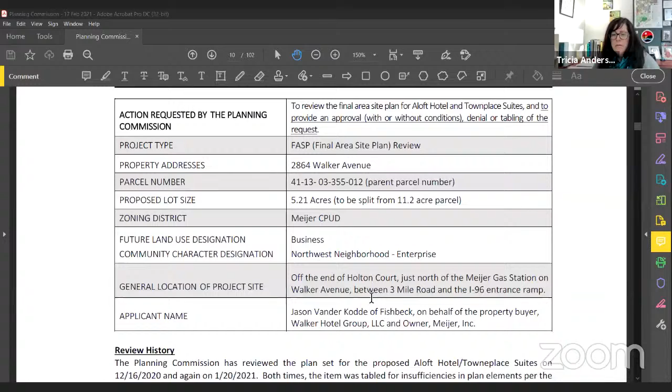This is a split that will result from the 11.2 acre parent parcel. It's part of the Meijer CPUD. And the future land use designation is business, northwest neighborhood, enterprise for community character designation.

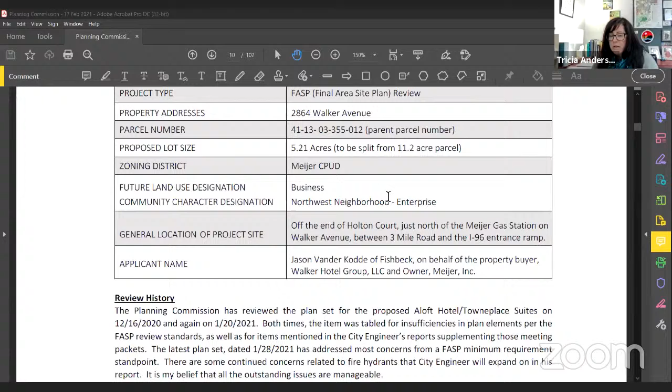Again, this is off the end of Holton Court, and it's just north of the Meijer gas station on Walker Avenue between 3 Mile and the I-96 entrance ramp. And we have Jason Vander Kodde of Fishbeck joining us to represent the property buyer, Walker Hotel Group, and the owner of the property is Meijer Incorporated.

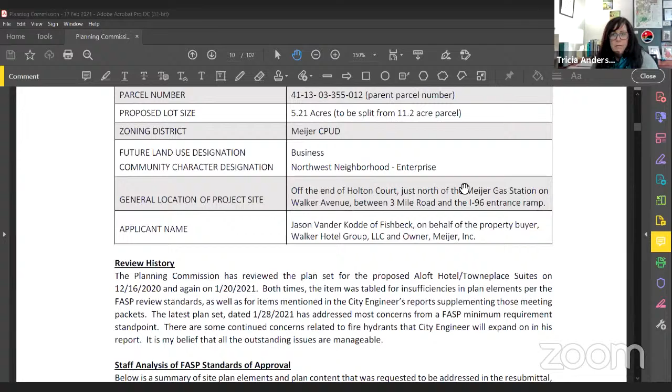I only have a few comments because this is our third go round with this agenda item. And this third time, the applicant has addressed most of my concerns. I just have a few minor manageable items that I would like to bring to your attention. And I'm going to go back to sharing my screen.

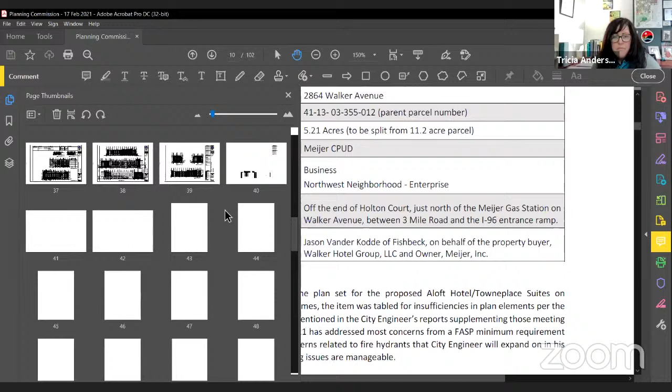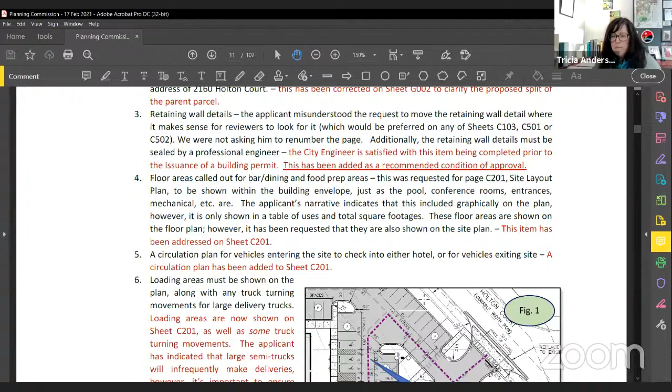I should have just kept it on share. So the main items that I would like to go through, if I can ever get to this little picture I'm looking for. The first one being that we asked the applicant to provide us with some truck turning movements and some site circulation.

A few truck turning movements were provided, but there's one that concerns me just a little bit, which is if a truck is coming in - picture your beer distribution truck from Founders or any kind of semi truck that comes in to deliver beverages. So they've created a designated loading zone here, but we need to make sure that trucks coming in through this entrance and heading over to this loading zone to unload for items being delivered to the WXYZ bar can actually make that movement without hitting anything.

And so this is manageable. We've asked that the plans be revised so that we can see that a truck can get in here with no problem.

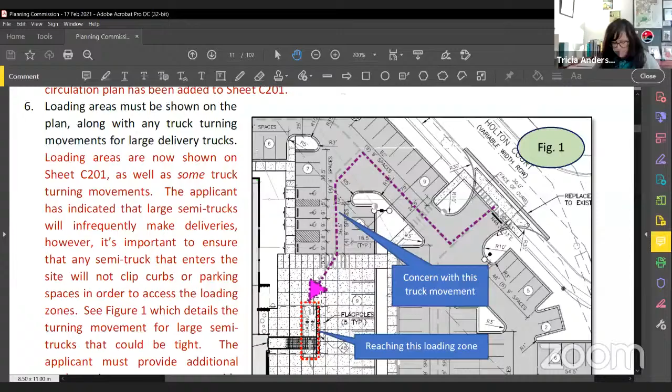And so that's recommended as a condition of approval.

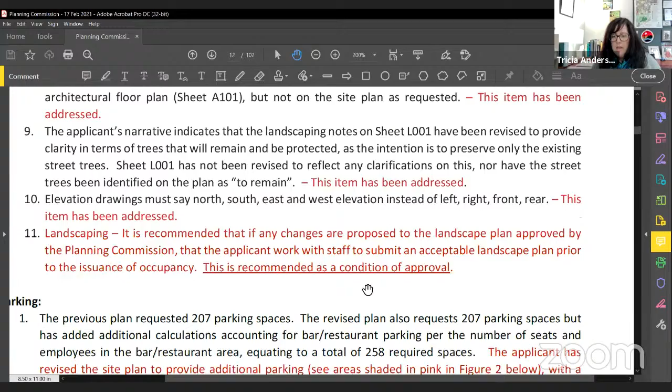The other thing I wanted to touch on briefly is landscaping. The landscaping plan that was provided is acceptable. But if any changes are proposed to that landscape plan after this planning commission meeting, it would be helpful to allow staff to work with the applicant to approve any changes to the landscape plan without the need for the applicant to go back to the planning commission. So I've added that as a recommended condition of approval.

In the previous plans, the major item of contention with this plan was parking. With all of the uses being proposed on this site—the 2 hotels, the conference rooms, and the WXYZ Bar and Grill—that would require a total of 258 parking spaces.

Previously, the applicant was asking for 207, and we weren't quite comfortable with that, knowing there is a possibility for all these uses to be in use by not shared users all at the same time. So this recent plan provides 244 spaces. If you'll see on the screen here, I've highlighted the areas in pink where parking has been added to the site.

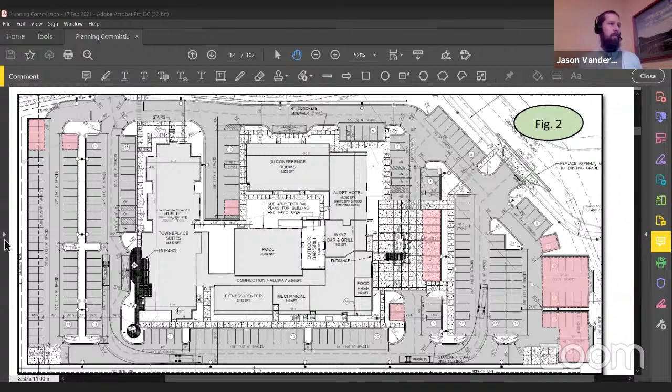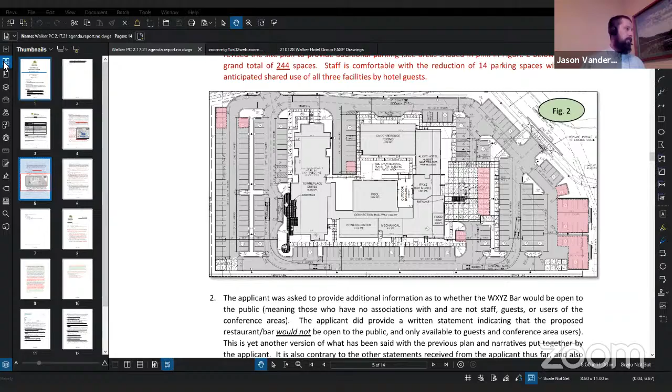Tricia, is it possible for you to bring up the page of the document, page 12 of 102? My computer's really slow. Okay, no worries. So in answer to the question, there's... if you have it, Jason. Sure. Jason, am I able to share my screen a moment? Yes, if Jason can. Says that it's disabled, so. Yeah, Jason can. Try now. All right, there we go. Can you see my screen? Yep. All right, I'm going to try to zoom in here just a little bit better. I think that's about as good as I'm going to get.

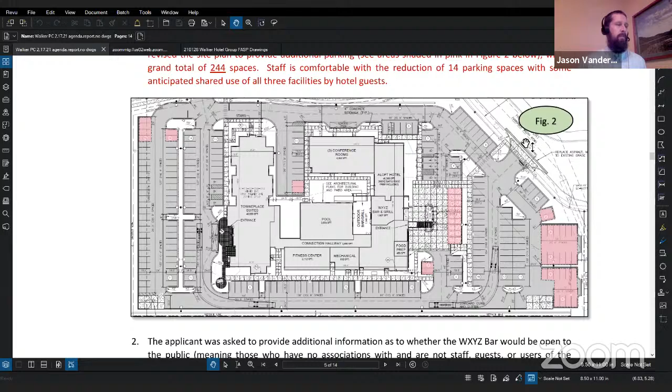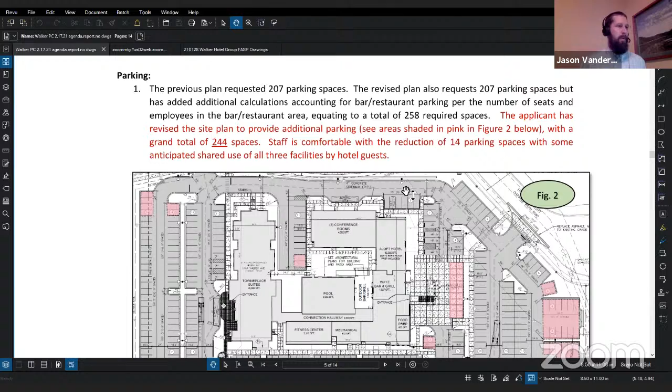In answer to Tom's question, Tom is curious how the traffic is going to make a right-hand turn into the parking lot and a left-hand turn into the loading zone. That is the move we anticipate smaller vehicles like an Amazon delivery or a FedEx box truck would make. If it's a larger truck with a trailer, that would be too long for that sharp a turn. The vehicle would have two other choices: they could continue around the hotel in the counterclockwise direction and come into the loading zone from the east, or they could come in along Boyer Drive, make a left turn, and then a right turn to get into that same loading zone from the other direction. So that movement may preclude a large trailer, but will accommodate most small vehicles. Large vehicles will simply do a counterclockwise or clockwise motion around the hotel to get there. So we'll provide a truck turning template to show the largest vehicle that can safely make it.

And if there is a larger vehicle, there's two alternate routes for them to accomplish the same parking space. So the loading zone is in the front door of the hotel. That's correct, that's where most supplies and materials are brought into the facility. And it's not large volumes, it's fairly small volumes and fairly small deliveries. A lot of the hotel operation is self-contained with the laundry room, and the other services they provide are self-contained within the building for the most part.

Well, other applicants have heard this comment before, that yeah, small trucks, right? And someday I'll take a picture of a 53-footer trying to make those maneuvers in there. So I think it's a poor location for a loading zone, but it's not my hotel.

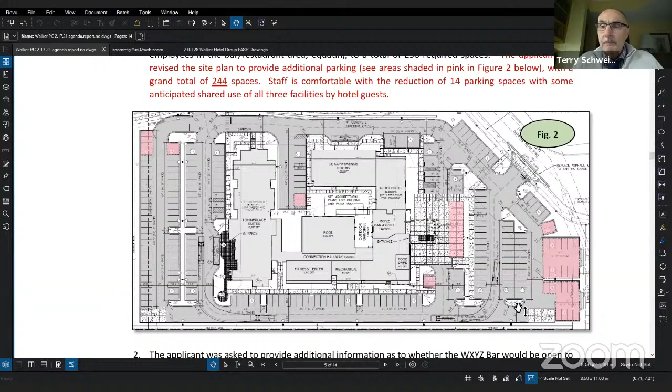Thank you, Tom. Any other comments or questions? Well, are we in a position now to entertain a motion for action on this request?

I'll make a motion, case number 20-879, motion for Aloft Hotel Towneplace Suites final area site plan. I make a motion to approve the final area site plan set, last revision dated 1/28/21, for the Aloft Hotel and Towneplace Suites project within the Marriott CPUD located at 2864 Walker Avenue with a future address at 2160 Holton Court, as it does meet the standards set forth in the City of Walker zoning ordinance.

Conditions of final area site plan approval. Number one, the applicant shall provide 4 sets of sealed plans reflecting all conditions of approval prior to the issuance of a building permit. Number two, the applicant shall provide a drawing of the retaining wall details, sheet C510, sealed by a structural engineer prior to the issuance of a building permit.

Number three, the applicant shall revise sheet C201 to provide additional truck turning movements for review and approval by the city engineer to ensure maneuverability prior to the issuance of a building permit. Number four, the applicant shall work with staff to review and approve any changes to the landscape plan prior to the issuance of occupancy. Findings of fact: the final area site plan conforms to the current and proposed City of Walker master plan.

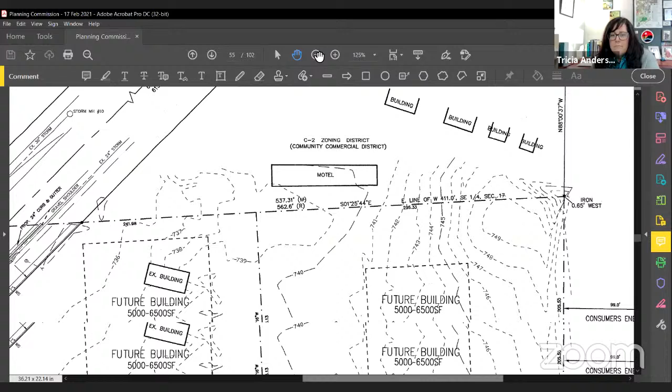Okay, so here is the original PASP. Oh my gosh, technology. We're getting there.

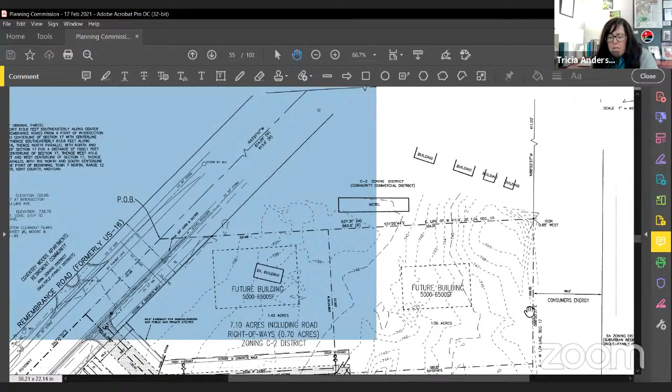Okay, so this is Remembrance Road over here. This is the existing motel. They have quite a big parking lot in the back to the north, and then there's the Dollar General building here. When the accessory building was first proposed, the site plan showed the building as being sort of right here, right over this conceptual line.

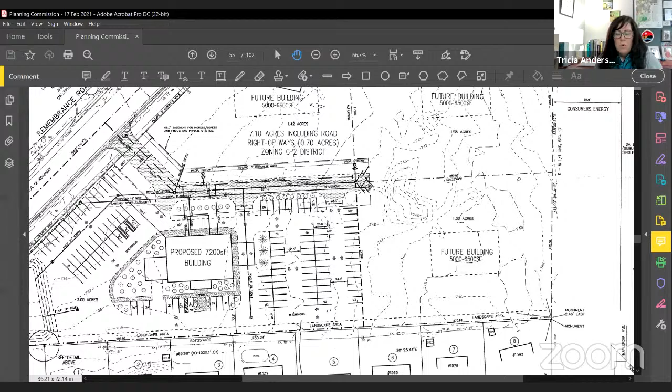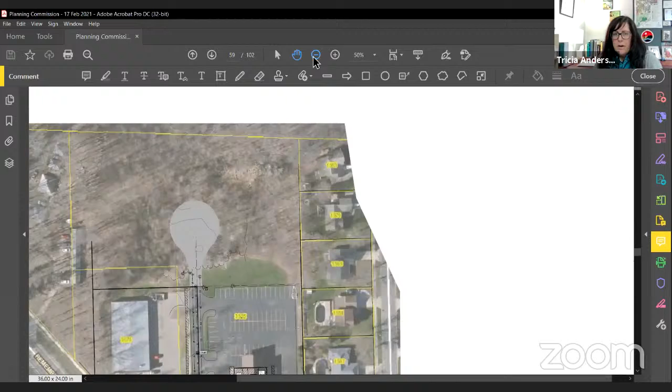Because of that, staff said to the applicant that we should probably have you guys update this PASP so that if these two lots to the north do end up getting developed, we'll have a clearer, updated conceptual lot lines for you, or for a potential developer, to go by. So we have Steve Witte, who's representing the mortuary, and this is what he has come up with.

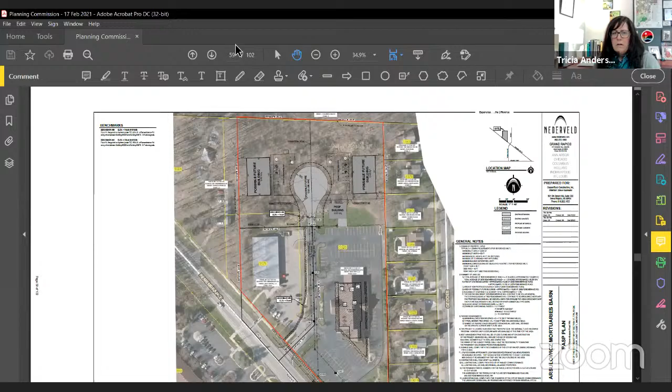So in the future, if these two lots are to be developed, this would end in a cul-de-sac road here, and this would be a private street. The building is being proposed right here, and what they've done is moved this conceptual lot line out so that there's at least 10 feet between the building and this conceptual lot line. He's also put some updated building and parking lot layouts for these two outlots if they're ever developed.

At the time, it made a lot of sense for the property to be developed as a planned unit development, because development was really booming in 1999 — there was a lot going on over in that Walker Village area. It made sense to start securing easements for access, so if they ever wanted to allow future development on the northern end of the site, they'd have everything ready to go.

But there hasn't been any movement on development on those two sites. Now that we have the property owner requesting planning commission approval for the accessory building, we asked them to update the plan. They've done that, and staff is supportive of the changes, which are minor, to the updated PASP, and we don't have any issues with the proposed outbuilding. The city engineer has some comments related to utilities that will come into play if those other two lots to the north ever do get developed.

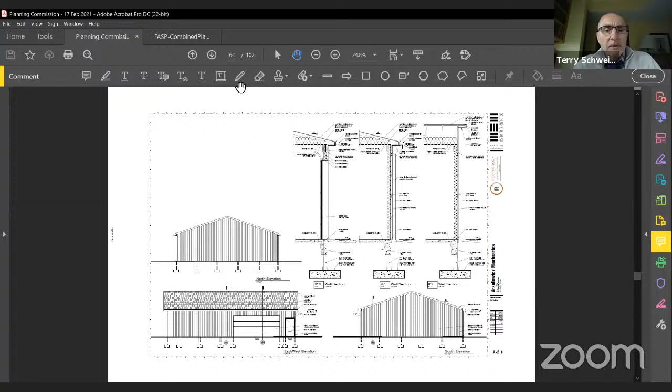Steve, either with Copper Rock or Steve Witte, what's the height of the sidewalls on the building? They're 12 foot. Okay, and what's the distance from the ground to the peak? That's going to be about probably 17 foot.

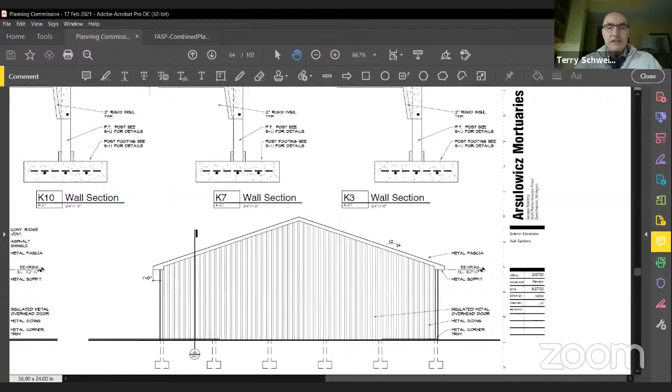Okay, just in an effort in this type of a setting to give the audience a better idea, not only where it's going on the site, but also how large it may be.

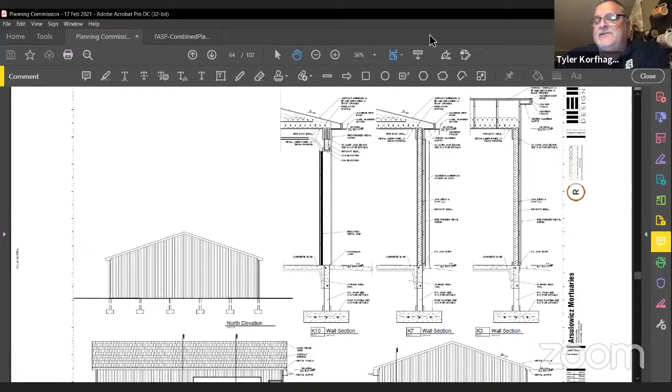Any other comments or questions for the applicant? I just looked up when they started. They started in 1938. Oh wow, a lot longer than I thought.

Okay, this is advertised as a public hearing. Do we have a motion to open the public hearing? I'll make that motion, Mr. Chair. Motion by Tyler, supported by Stephen, to open the public hearing. Tricia, if you could go through a roll call vote, please.

Tom, Yes. Joe, Yes. Pat, Yep. Terry, Yes. Scott, Yes. Steve, Yes. Tyler, Yep. Mark, Yes.

Okay, public hearing is opened. Those out in the audience that would wish to comment or pose a question concerning this, there's a virtual hand feature, and then there's also the option of being recognized if you're on by phone. Anyone that would wish to offer a comment? I'm not seeing any hands raised. Okay.

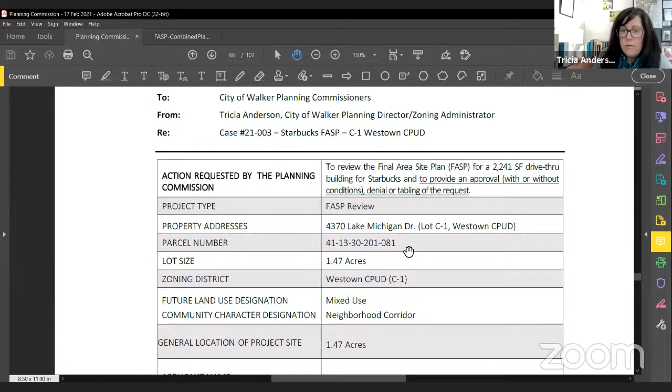Okay, I'm going to attempt to share my screen again. All right, so this is a request for final area site plan review, and the action requested by the Planning Commission is to review the final area site plan for a 2,241 square foot drive-through building for Starbucks, and to provide an approval with or without conditions, denial, or tabling of the request. This property address is 4370 Lake Michigan, lot C1 of the Westown CPUD. This lot is 1.47 acres and is zoned Westown CPUD. Future land use designation for this lot is mixed use, and it's within the neighborhood corridor as a community character designation.

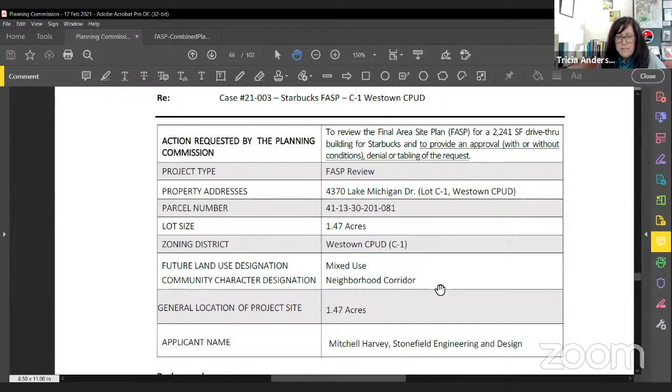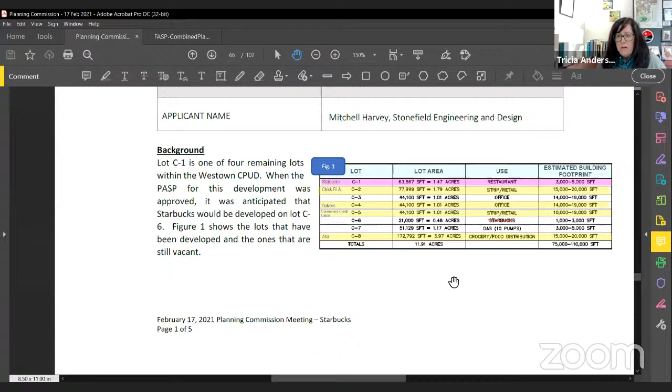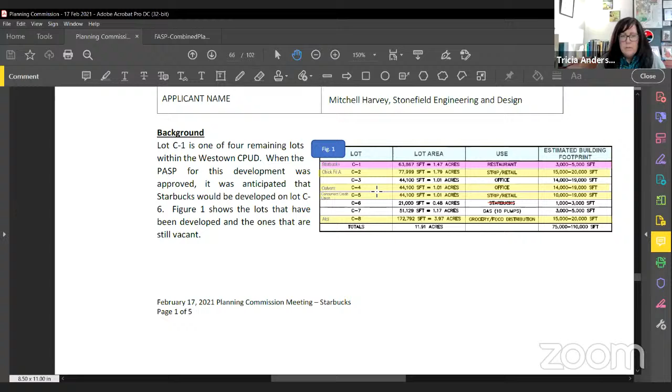And then we have Mitchell Harvey of Stonefield Engineering and Design joining us tonight, representing the folks from Starbucks. This is one of the last remaining, one of 4 remaining lots within the Westown commercial PUD. Originally, the PASP for this development called for a Starbucks at lot C6. I'm not exactly sure what happened there, but Starbucks is pursuing development at lot C1 instead. Both are smaller lots and could only support something like a small drive-through, so the size of this lot is acceptable for this size of development.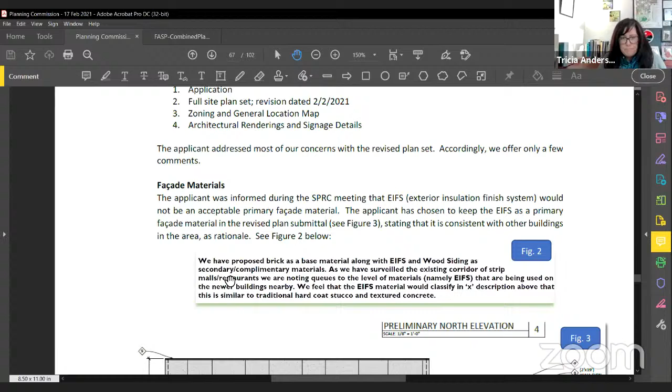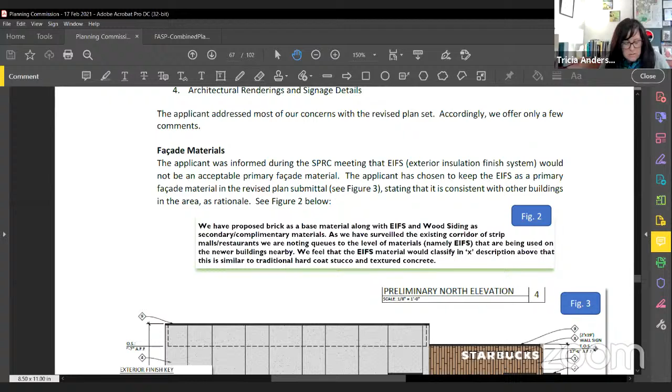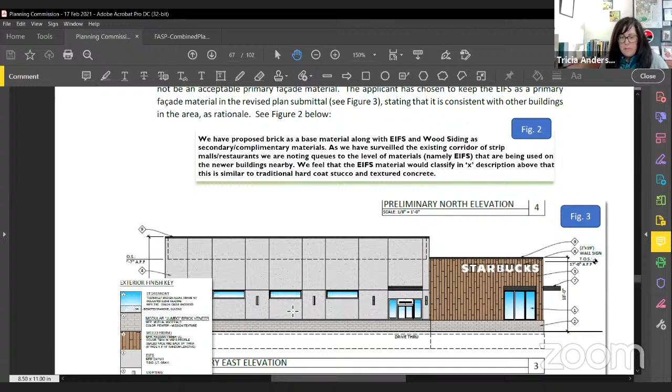So I'm just going to go through some of my highlights. We had a site plan review committee meeting, and the applicant received a lot of feedback from staff and has addressed most of our concerns. I just have a few minor comments that are manageable that I'll go through quickly. The first item is that the primary facade material being proposed for this building is EIFS, or exterior insulation finish system, which you've seen a few proposals for, and we've kind of already set a precedent that this is not a good material long-term for various reasons. So we have recommended that the applicant provide a material that is acceptable per the ordinance and the facade design standards.

However, since it's a planned unit development, the Planning Commission has discretion to accept this facade material if they wish. But I should mention that we've kind of set a precedent to try and not allow this type of facade material, just because it's not good for the long term.

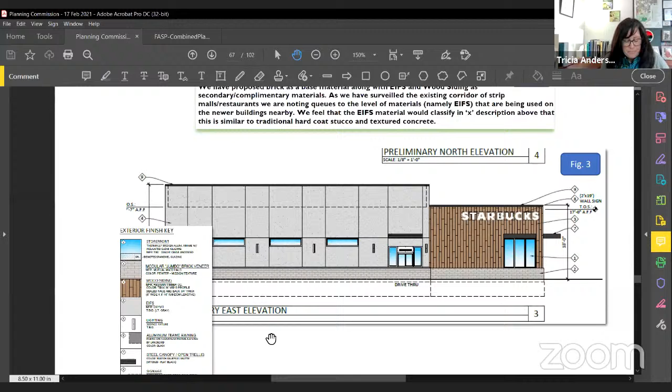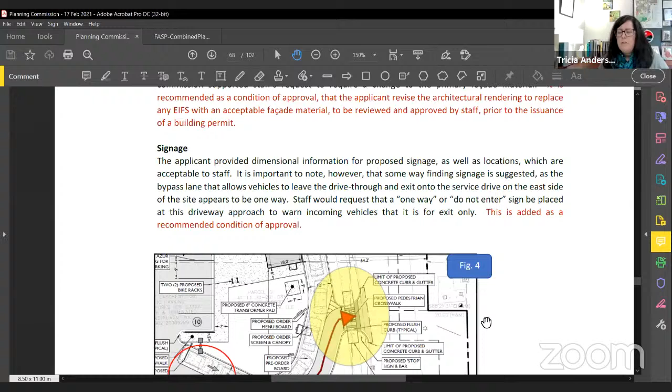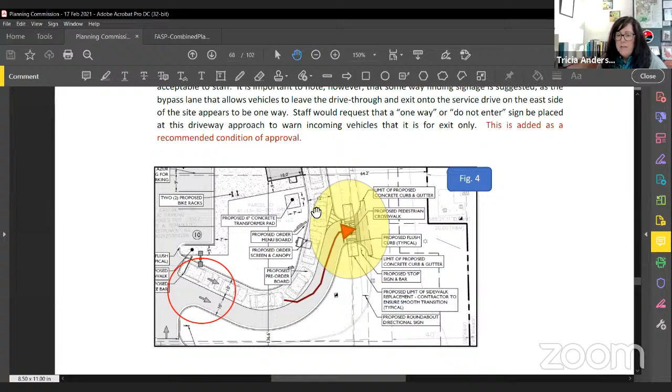The next item is the signage package, where they've provided wall signs, dimensions, and a ground mount sign along the Lake Michigan Drive frontage. Please correct me if I'm looking at this incorrectly, but it appears there should be some sort of signage at this drive approach indicating it's one way only, because cars enter the site this way but can't turn in at this approach, since it's for cars exiting the drive-through. They've revised the plan to provide an escape lane, and these lanes are both going this way. So I've added as a recommended condition of approval that do-not-enter or one-way signage be placed at this approach.

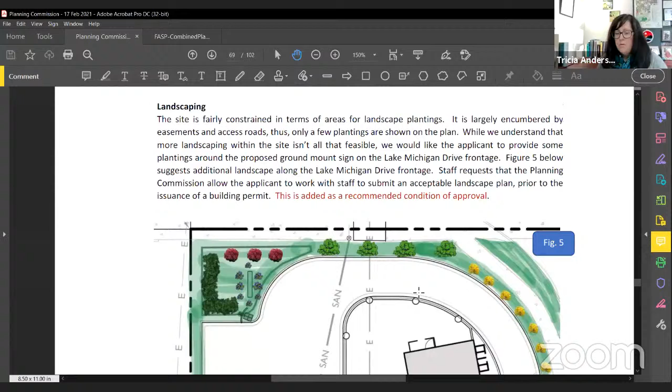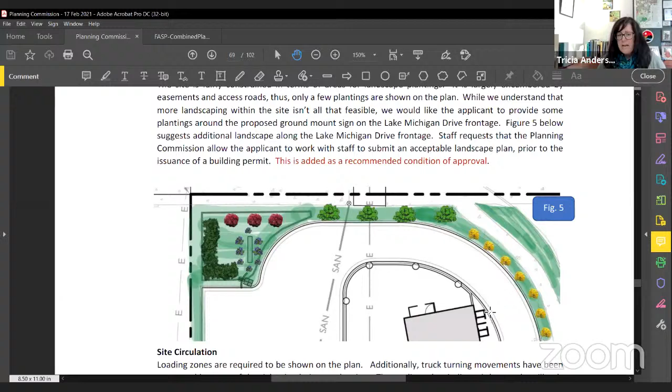The next item, also manageable, is that the applicant has proposed a little bit of landscaping—I think it was two trees and about nine shrubs. It's a small site, encumbered by a lot of easements for ingress, egress, and cross access, so there isn't much space for landscaping. But I'd suggest they dress up the frontage area along Lake Michigan Drive. This is just a snippet of suggested landscaping that could easily be added to this end of the site to provide more curb appeal while still complying with our landscaping requirements. So I've asked that the Planning Commission allow the applicant to work with staff to submit a revised landscaping plan prior to the issuance of a building permit.

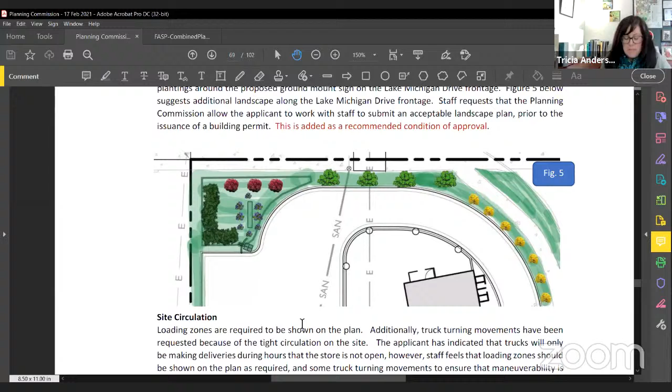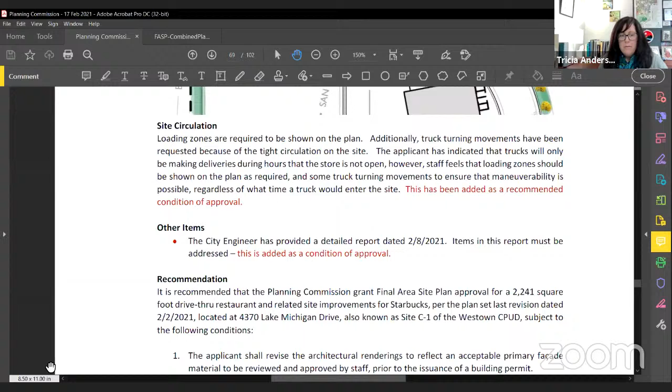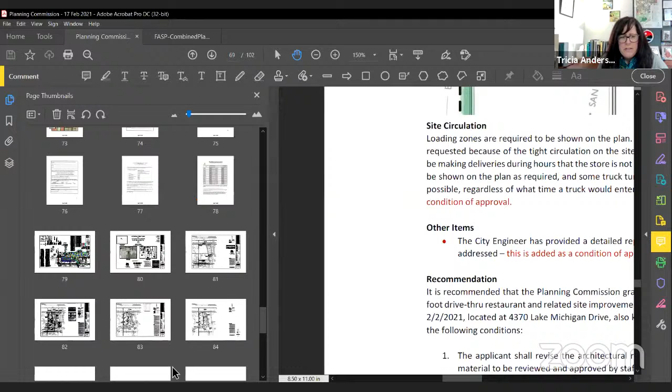One last item—I should probably pull up the site plan for this. The site, as mentioned, is pretty small and constrained, and it does not show any truck turning movements. So I've asked the applicant to provide truck turning movements, since there's also not a loading zone. Even though the applicant indicated loading will only occur when the business is closed, we don't really have any way to regulate that. Trucks could easily come during the day if that's when a delivery can be made, and the business might happen to be open still. So there should be some kind of loading zone. I know the applicant would like to discuss this further to see if the Planning Commission would be comfortable waiving that requirement, but it's important that we maintain good site circulation for delivery trucks, since the possibility exists that it would happen at the same time. So I've added that as a recommended condition of approval.

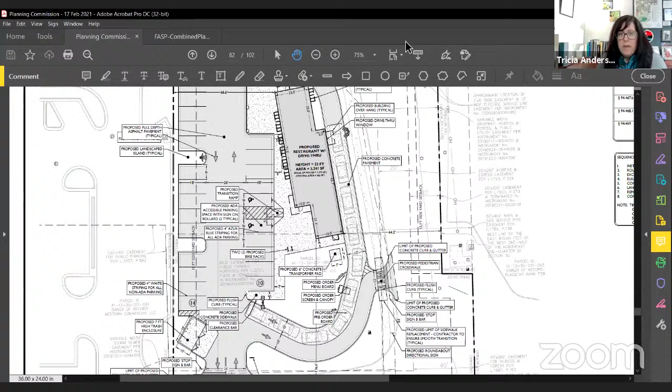We also have some items that the city engineer has outlined in his report that the applicant will need to address as well.

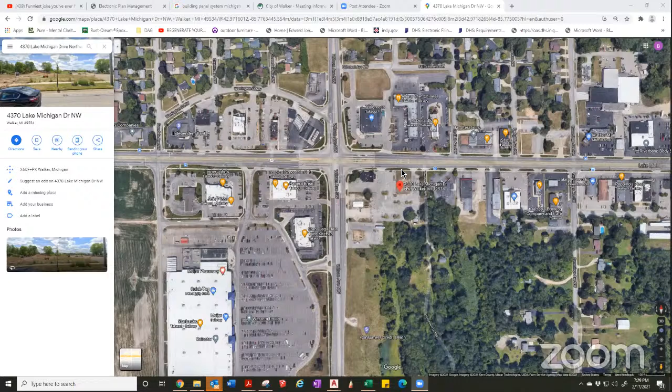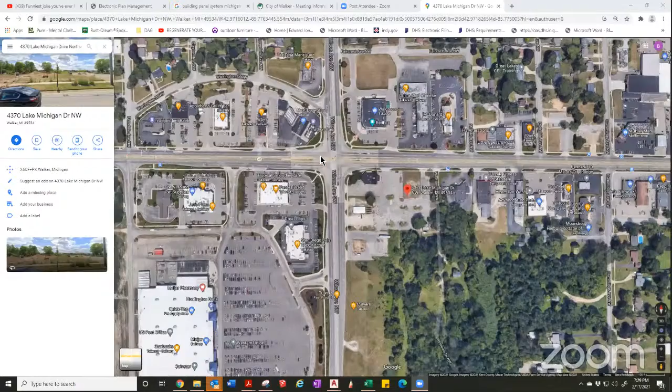So there's the site, and here is Wilson Avenue, of course, and Lake Michigan. We took our visual cues from early on, and I apologize up front with regard to the EIFS as being a primary, I must not have picked that up in the meeting. So this is our neighbors to the west, and there's the Panera. As we can see, quite a bit of the main elements are the EIFS product. I think they do have brick up on top. Actually, this is all EIFS on the upper portion, and some of this is block.

And these are all Meijer outlots. Moving further west, same with the whole strip, so it's about a 50-50 split for this mall. Of course, the Meijer is quite a bit of EIFS. These seem to us to be the newer buildings. We went, go back.

Sorry folks, I'm going in front of the Meijer's, the Biggby Coffee as well. These were EIFS elements on these buildings, so we thought it was possible to be able to do that.

I'll get back to the design premise here in a second. We know further down Lake Michigan that there are a lot of older buildings, so those weren't really relevant to what we were doing, but there's a Taco Bell down the street

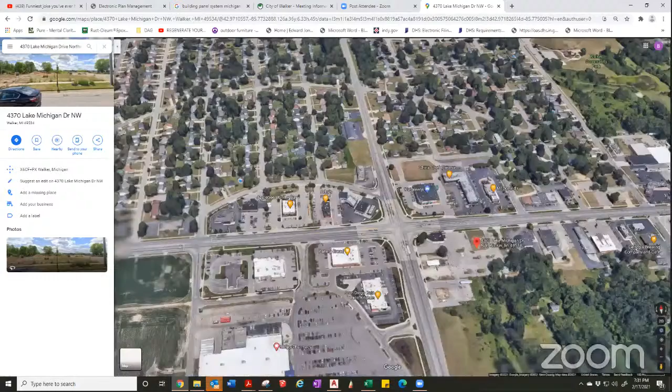that is just about almost all EIFS at that point too. So we get back up in the sky to where we are. Let me pull up, can everybody see that elevation? Yep, that's coming up. So if we look at the plan view, I'm just going to take you back into the design portion we worked out with Starbucks. Basically, they like the very contemporary, a little more up-to-date flare, clean, minimalist, crisp, horizontal, rectilinear type geometries.

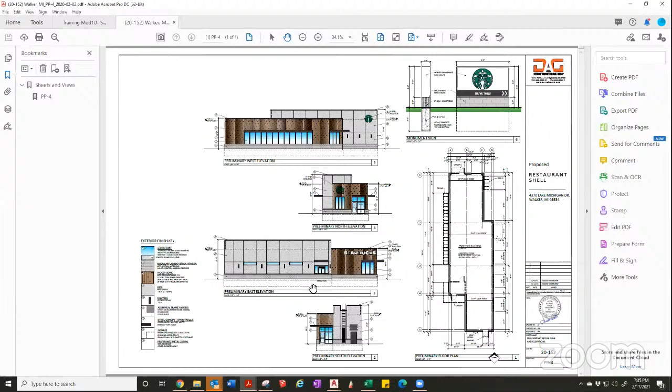Well, I just want to say hi and introduce myself. So first, my name is Gabe Schuckman with Walker Retail Management, my company's Aurug USA. And Bo, are you spinning that thing around? Is that you? Yeah, you're giving me a headache, man. I swear to God, you were.

I was watching you do that when Tricia was speaking, and Tricia, I almost fainted and lost consciousness when he was doing that a second ago.

One, I want to thank you guys for giving us the opportunity to be part of your community. We've done a few other projects, including one in Walker a few years ago, and this is our second project in Walker. We're beyond excited to be here, so thank you for taking the time. We do a lot of work in and out of Grand Rapids, so even though we're Metro Detroit based, Grand Rapids is a second home to us.

We do a lot of Starbucks work, not only in Michigan but across the country, so we're very honored to be part of the Walker community and to do a lot of work with Starbucks. I know we'll find a great solution this evening. Trish should definitely hear everything you're saying. The only thing I wanted to point out is that, as critical as keeping your city beautiful is, and I totally understand all the points, for Starbucks it's also obviously a major concern.

They're signing a tremendously long commitment to be at this project with us, and Starbucks is doing business in a lot of different climates and environments. For whatever it's worth, they were comfortable with the EIFS look. But I want to make a note that this prototype we've presented to you today, we spent months with Starbucks developing it, and this is their new prototype that they're utilizing across the country. So wherever we get to, I want you to know we're trying to bring a beautiful, high quality development and project. Trish and her team have just been absolutely incredible to work with.